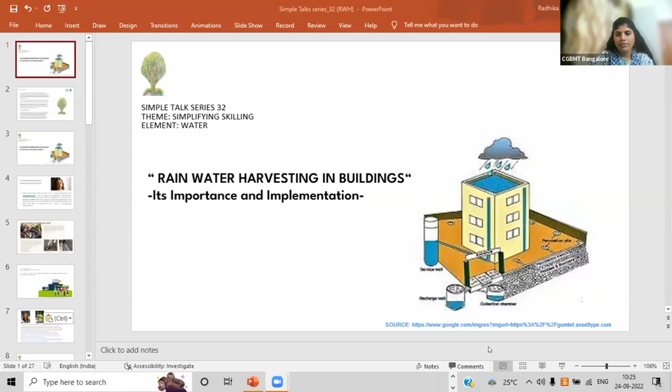CGBMT organizes Simple Talk series in a very grand way, covering all different topics. So today's interesting topic is about rainwater harvesting, and this is Simple Talk series 32. About CGBMT, the Center for Green Building Materials and Technology: it is an Indian non-government organization established on April 26, 2004. The trust was founded by architect Neelam Manjunath as a response to the dearth of awareness and human resources for sustainable development and lifestyle, to reach sustainable development goals. Our work responds to the environmental issues of our times through eco-education, advocacy, research and development, and on-the-ground community projects.

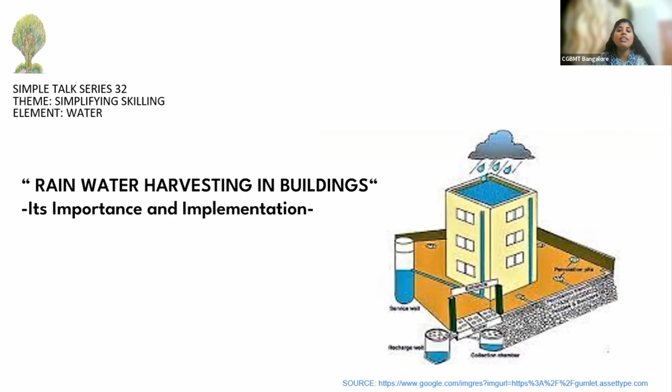Shubha Ramachandran leads the water team at Biome Environmental Trust. She has designed and implemented several rainwater harvesting and wastewater treatment systems, primarily in and around the city of Bangalore. At Biome, she has been working on understanding groundwater, wastewater, and wetlands. She is also a TEDx speaker and has represented Biome at the World Water Week in Stockholm. She is a civil engineer from IIT Mumbai.

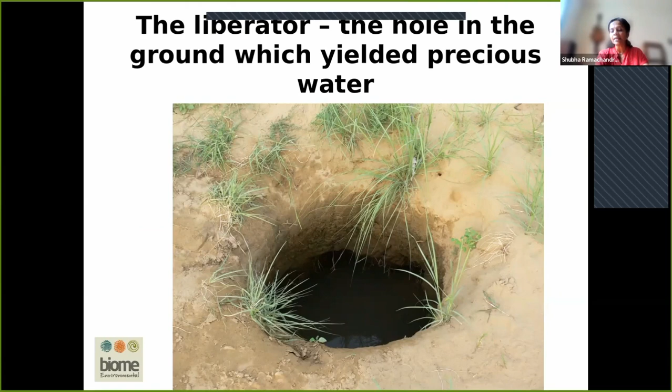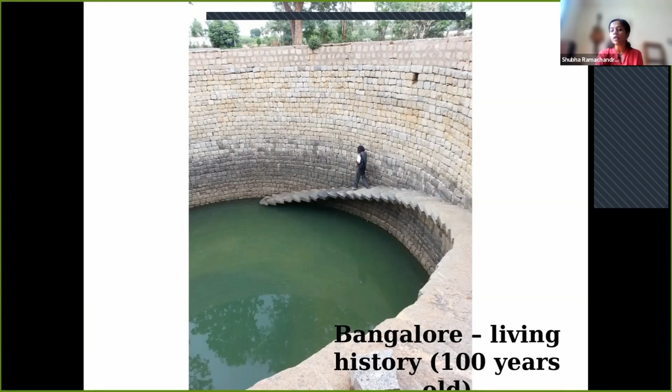Now quickly coming to that, this was just to set up a precursor to how we are approaching the entire topic. Like we all know, given especially the southern part of the country where we have no access to glacial melt rivers, the only water we get is all coming to us from rain. Whether we take it from rivers or from groundwater, deep bore wells, open wells, lakes, finally the source of all water is rain.

What has really changed as we have urbanized, though now rainfall patterns are also changing, is primarily this: earlier, when the land was not built up, there were more trees, more undergrowth, and the land itself was not exposed or hard. Of the rain that fell, some was intercepted by the trees. The surface runoff would not be as much because the water would percolate a little, and we have what are known as interflows and base flows. There would also be some water lost to evapotranspiration.

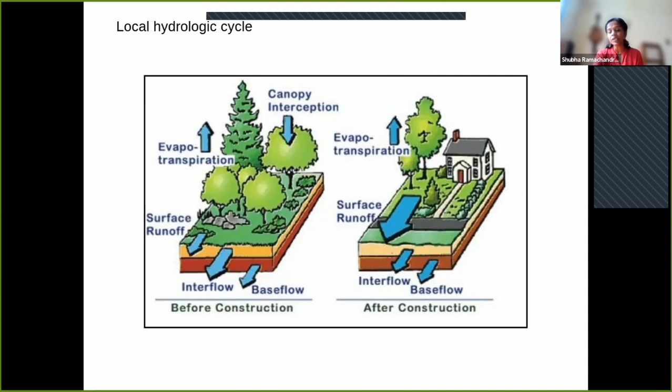Over a period of time, as we built our surfaces, what really happened is that our surface runoff has increased because the ground has become harder. The water, as it falls on the ground, is not able to percolate into the ground. That's why you can see that interflows and base flows have reduced, but the surface runoff has increased.

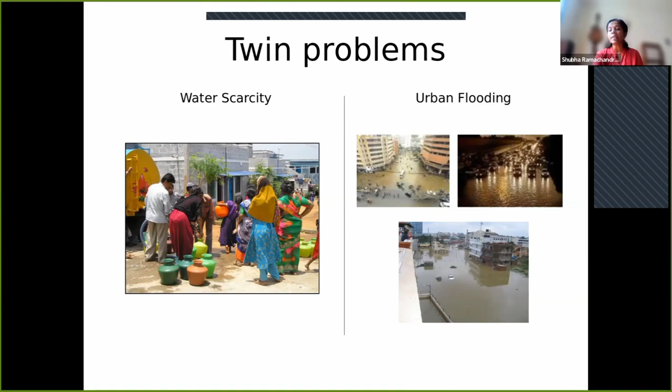As a result of this, especially in urban areas, in summer there is water scarcity. Sometimes across the year there is water scarcity because there is not enough water under the ground, or the rivers are not able to supply. As we just observed in Bangalore, and actually across the world, many parts have experienced extreme urban flooding because now the ground is crusted and the water has nowhere to go. In many cases our lakes or rivers have been encroached upon, and that results in urban flooding.

So what can we do about all of this, and how does this set the stage for rainwater harvesting? I think because the runoff has increased, in a way the potential to hold on to that water has also increased. So we have to see, given our current circumstance, how do we make the most of the rainwater that falls on us?

From there, the water has to be conveyed and taken to a point where you're going to use it for some purpose. That's called the conveyance. If you look at a house with a sloping roof, it would be a gutter. If it's a college campus, there are down pipes. Or if it's just a road, there are drains on the side.

So all of these are various modes of conveyance for taking the water from one place to another, for wherever you want to use it subsequently. Then normally there is a process of filtration, because depending on what you want to use the water for, you have to filter it appropriately. If you're going to be using it for drinking and cooking, you have to be much more careful with your filtration. If you're going to use it only for other domestic purposes like cleaning, washing, bathing, you don't have to bring it to potable water quality standards.

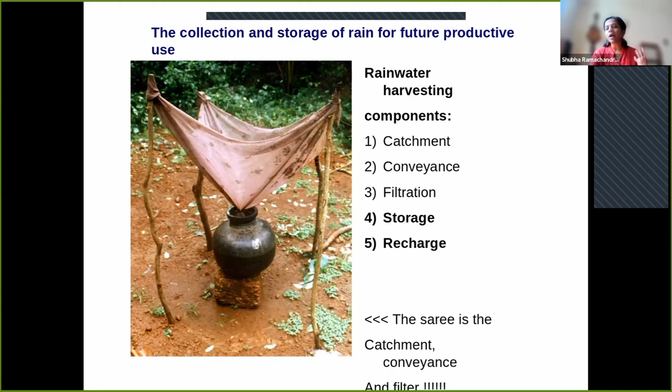But when we actually design these systems, they're a lot more complex. And a lot of this information that I'm speaking about is also available on a site called urbanwaters.in. We'll cover it later in the presentation, but we are trying to build a site like this for every city. Right now we have bengaluru.urbanwaters.in, but over a period of time there is also tumkuru.urbanwaters.in. The idea is to have Chennai, Hyderabad, all of these cities coming up pretty quickly, where you know about the rainfall in a particular area, how do you harvest it, your lakes, wastewater, groundwater, all of that.

Now, an important part of rainwater harvesting is really to understand how much rain do you get, because that will decide how much water can be harvested. And it's not only about how much, but how the rainfall is distributed as well. Because if it's not going to rain for many months in the year, then any system that you have set up will lie unused for that portion.

So the question that comes to us then is, okay, it's raining this much, how much can I really harvest? Now, when I say harvest, it's dependent on the catchment on which the rain falls. And it's also important to see how much do I need. So this is an important number as I come to the calculation itself.

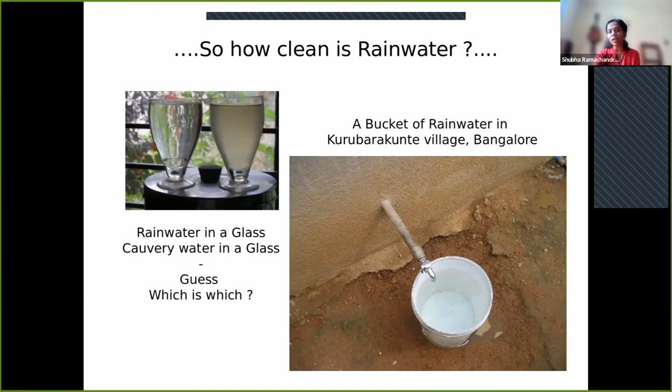And that's what a rainwater harvesting system looks like. You have a pipe that brings down the water. There is a first rain separator here, which we'll speak further about. This is a very simple filter - it's actually not even really filtering, but allowing for sedimentation. The water falls here, and the solid particles settle to the bottom. The overflow water flows into the sump, from where it can be pumped and used in the house.

The overflow from this sump flows into a recharge well, from where it percolates into the ground. When this also fills up and overflows, it can flow out into the stormwater drain, where we make sure it flows further. In fact, rainwater harvesting is also an important part of this system.

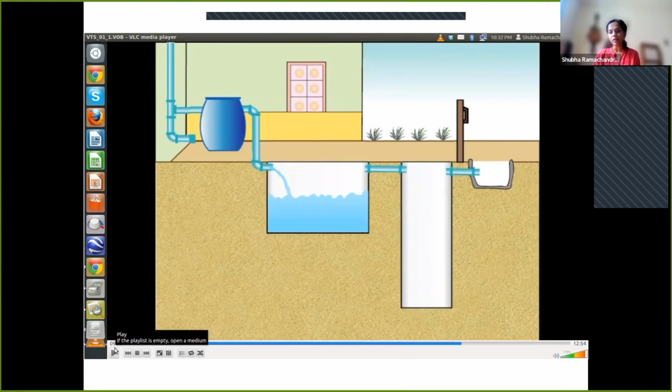You have to look at it like this: when the land was not built up, on every 100 square meters of land, when rain would fall, not as much would run off - let's say only 10 liters would run off from a particular plot. But now, because of the crusting up, where we had 10 liters earlier, we will have 90 liters running off - that's 80 additional liters of runoff from a plot of land. This is what can contribute to flooding, because the land was not expecting this additional 80 liters of runoff. If we were to harvest it, it's an extremely beautiful solution for avoiding or mitigating flooding as well, and we have a few case studies to speak about it.

How is it done? Very simply, join all the pipes and you can bring it to a storage. Here we see just a few examples to give you a sense for what it can look like. A rain barrel is an easy way to start. This is a filter, and this is also a filter, where the tank is also the filter itself.

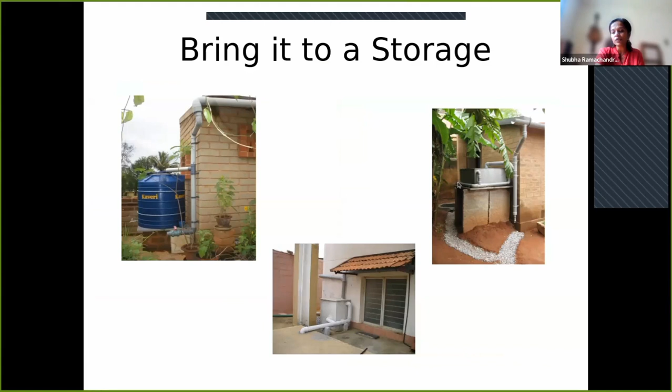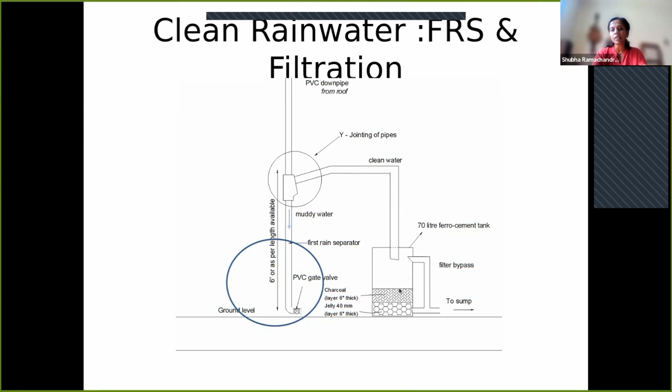This unit is called a first rain separator. The idea is that the initial water that falls on the terrace, we don't try to harvest or filter it, but there's a gate valve provided, using which you can allow that water to drain away. Only after the first 1 or 2 millimeters of rain has come down from the terrace do we harvest the remaining water by passing it through a filter. A filter can be fairly simple. Here we see a ferrocement filter made up of layers of charcoal and small stones and big stones. Very simply put, but the details and design can vary depending upon the end use you want to put the water to.

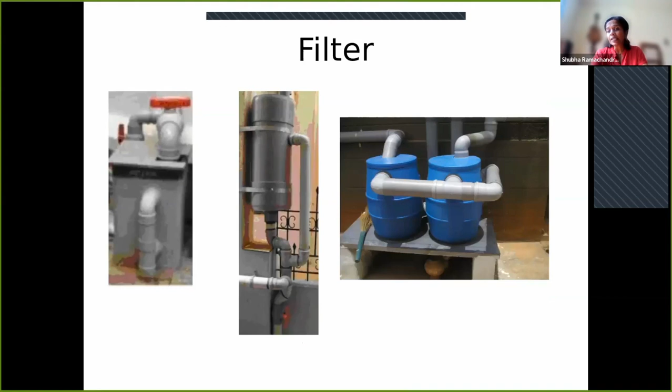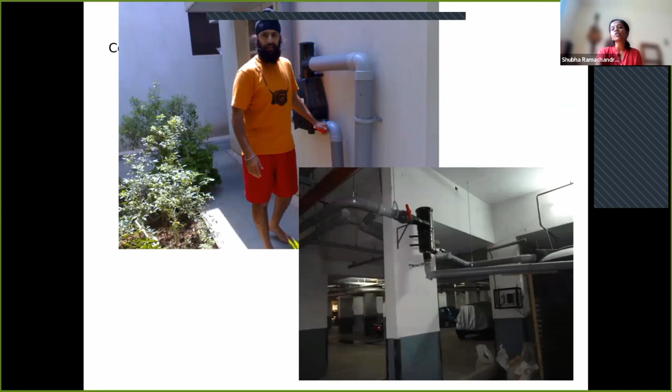These are all just images to show you what the first rain separation can look like, and what filters can look like. You can put filters together yourself with plumbing material. There are also ready-made filters available in the market, various brands, which are much easier to install because they're available off the shelf, and any plumber can easily install it. Here you see it in the basement of an apartment, and here it's at a home, but that's how filters are installed.

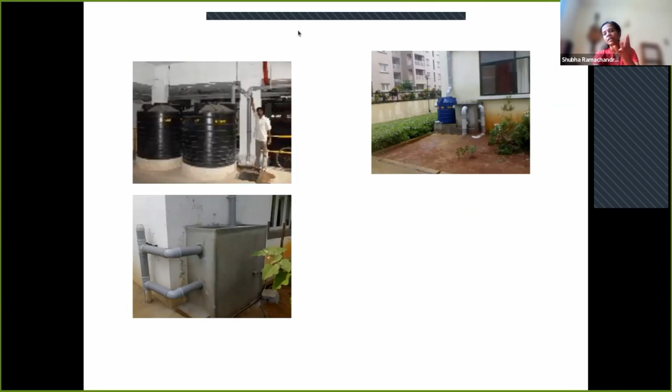These are all, again, various rainwater harvesting systems in basements of apartments, in a clubhouse. So this shows that in various buildings, it can be incorporated.

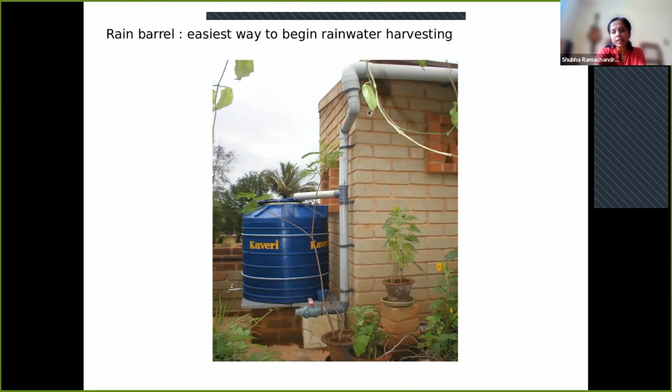Like I mentioned earlier, a rain barrel is really the easiest way. Here, all you do is build a small platform and place a drum on it, and the rainwater falls into it. This is the first rain separator we spoke about. The filter can be as simple as just a plastic bowl with holes and stones on it. For instance, if you're not going to use the water for drinking and cooking, and it's only going to be used for other cleaning purposes, then you can do with basic filtration that looks like this.

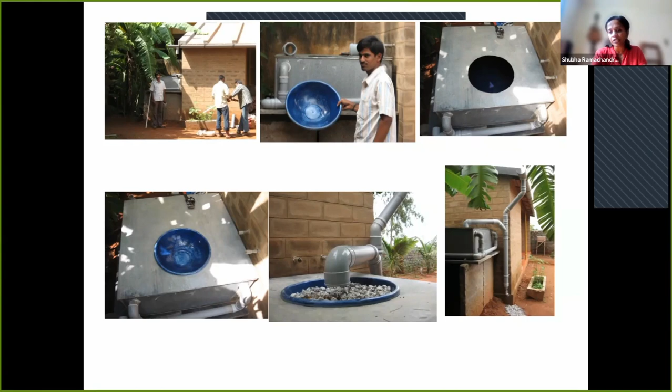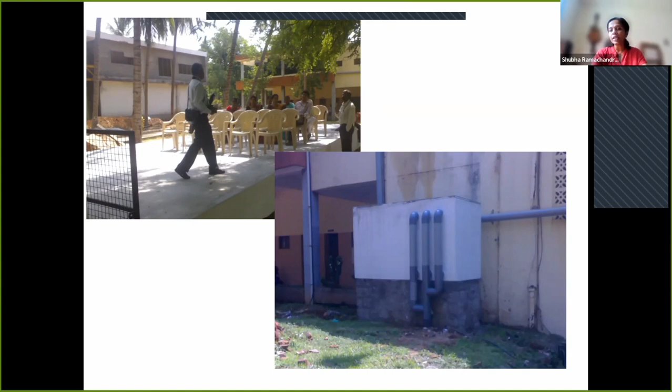Again, examples for storage, examples for filters. This is for a college that we had, for 3,000 square meters of rooftop. The filter looks like this. This is so much larger. Yeah, and that's the sump. Actually, this is the storage where you see the people sitting on it. That's the storage, because here the rainwater that could be harvested even for a small rainfall event was about 1 lakh liters. So when the rooftop is larger, the volume of water you can store is larger, and then you need a bigger sump and a bigger filter as well.

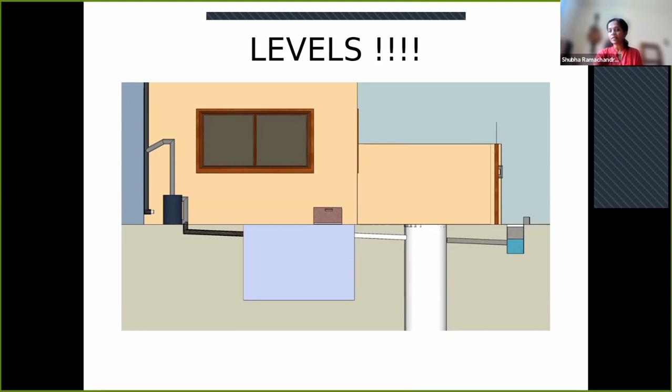The water can be clean, you can pump it and use it. It's very important to keep in mind levels, because all this while an important factor is that we are not using any energy, but the water is flowing with gravity alone, except for the point when you have to pump it back to your overhead tank. The philosophy behind rainwater harvesting is to keep it as simple, as maintainable, as local as possible, built with local materials, with local labor, not requiring expertise or materials from further away. So using gravity is a very important component of rainwater harvesting.

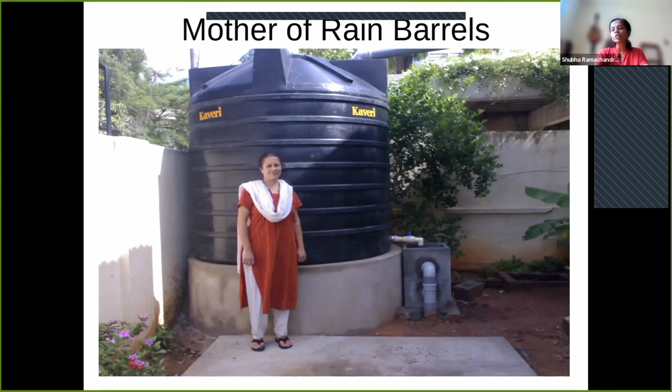This is a house in the center of the city. This lady didn't have space to build another sump, so she bought a 5,000 liter drum. Now that this system is installed, she can go without municipal water supply for 2 weeks at a stretch once her 5,000 liter barrel is full. The water is filled in the barrel, then passes through the filter. That's the filter. It's stored in the sump and used.

So this was about storage of rainwater and reuse. We will now speak about groundwater recharge and how we can use this water to recharge the groundwater tables.

Radhika, how much time has it taken? I don't have my phone. Shubha, you can continue. I think I'll continue, but I just wanted to check. I don't want to overstretch or under. No, I think it's just enough, and perfect.

Okay, so the next important thing we have to think about is that this water I can store, but I can't store all the water that comes to me. If there's a heavy rainfall, like how Bangalore received just a couple of days ago at 130 millimeters, if I just had a 5,000 liter sump, I would not have been able to hold on to all of this water. Also, given that if you look at most of our cities in the country now, more than 50% of urban water requirement, though we may think we are meeting it with river water, is actually being met with groundwater.

Groundwater tables are very quickly depleting across the country. When we speak of groundwater, we have to understand it at two levels.

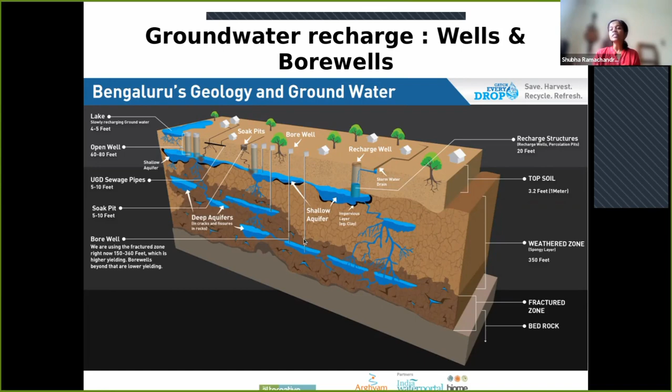In Bangalore specifically, recharge structures going 20 to 30 feet deep reach what is known as the weathered zone. You can think of this zone as a sponge that holds water easily and needs to be recharged. Deep borewells, however, get water from hard rock, from cracks and fissures, where recharge rates are much lower. So you have to decide what kind of recharge structures you want to make.

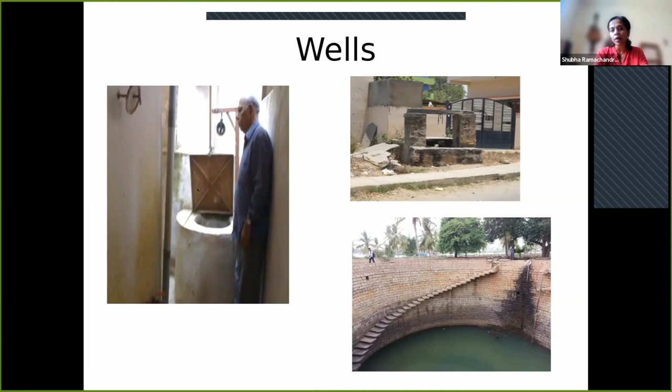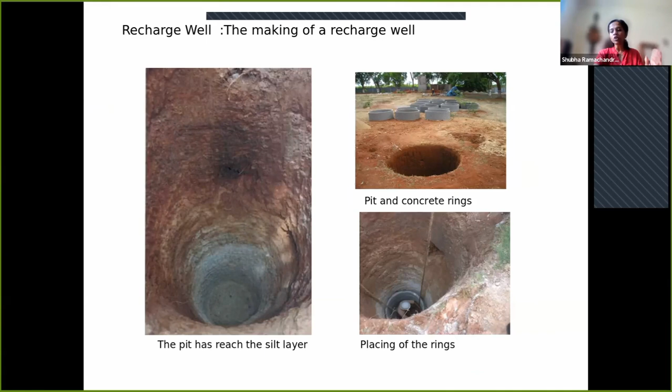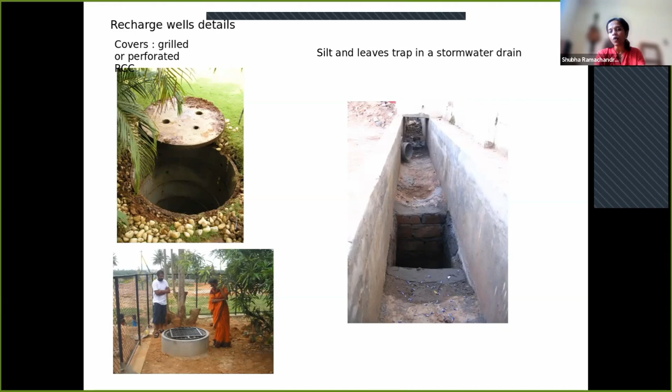This is how a recharge well is made. You dig a pit into the ground until you reach a layer where water can be absorbed. It is lined with concrete rings placed one on top of the other, and the annular space between the rings and the ground is filled with stones so the well does not collapse. On top, it's covered with a concrete slab or grill for safety, so nothing falls in accidentally.

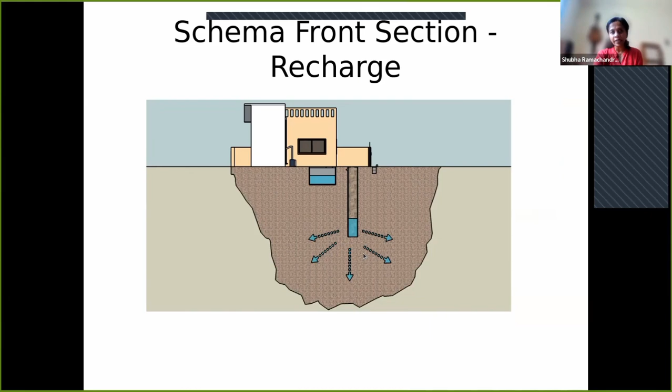These wells can be placed in stormwater drains or in homes, and borewells can also be recharged this way. Water comes into the well and percolates out into the ground. Normally, in the area close to the recharge well, the water table rises fairly significantly. Here are some images of what these wells in drains can look like.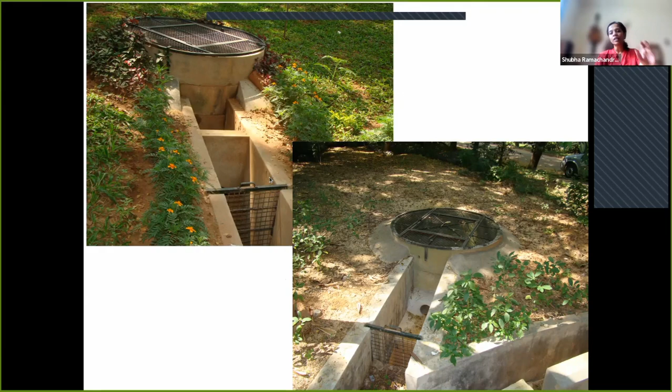This is important because drains often carry plastic, leaf litter, and other waste. So we put in small in-drain filters, a silt trap, or a check dam to obstruct the flow of water. Here, the structure you see is a check dam — when water flows in the drain, it obstructs it and directs the water through a pipe into the well, from where it percolates into the ground.

Various images show that even a simple structure like this can significantly reduce the speed of water and filter it before it goes into the well. The idea is that if the well starts to fill up with non-water material, desilting and cleaning of the well becomes required. So to reduce maintenance effort, you try to do as much filtration as possible in the drain itself. Also keep in mind that rooftop water is very clean.

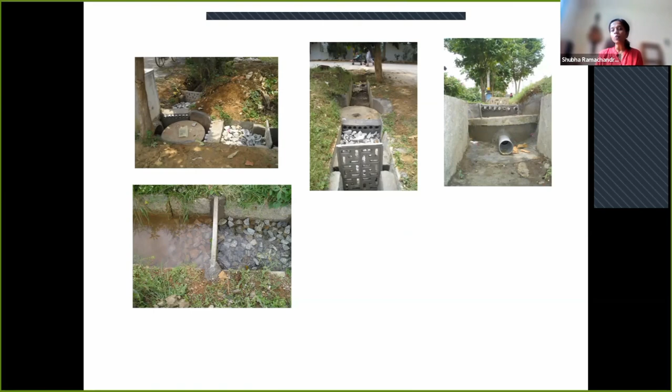If you filter rooftop water, you can store it and use it for all domestic purposes. Ground surface runoff from roads, parks and pavements is not as clean, so it's better to use it for shallow groundwater recharge, not deep groundwater recharge, and I'll explain why.

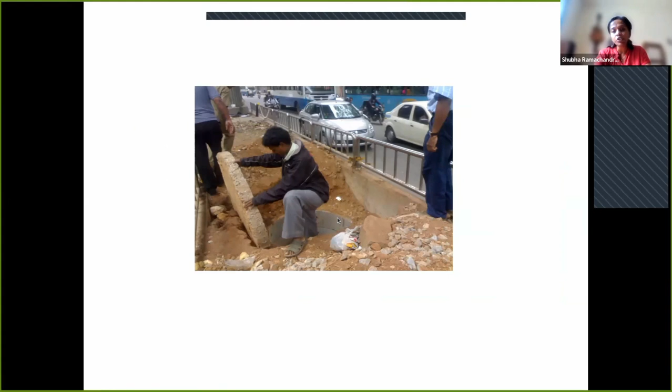Here's another example of a well in a drain, also taking water from a house. This one is actually right below the Bangalore metro at MG Road, showing it doesn't have to be in a house. The water runoff from the tracks and station is put into the ground right then and there.

A few examples of how groundwater recharge can benefit people. This gentleman had a well which dried up after 4-5 years of usage. Here you see the filter he installed to recharge the well. Now the well holds water for him all through the year, so much that he has cut off his municipal water supply and uses this well water all year round. The water is of extremely good quality, good enough for drinking and cooking.

He does have a UV filter at home as well. If we're using rainwater for drinking and cooking, it's advisable to boil it or pass it through some filtration to remove bacteria. That's his well, full of water that's pumped and used.

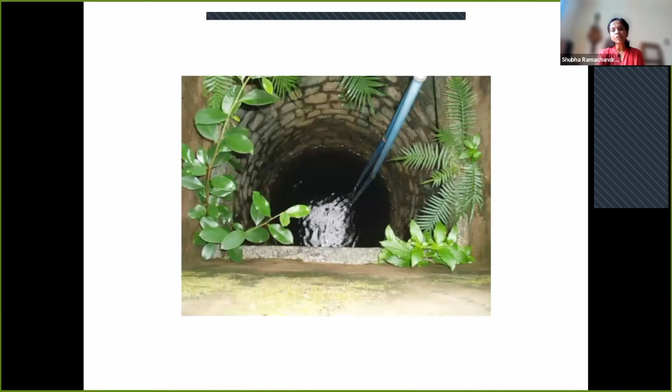This is another home in a different layout where this gentleman recharged his well, and again his well has water. An important part of rainwater harvesting is not just doing it, but talking to your neighbors about it, showing them the difference it has made, because that inspires a lot of people. That's really part of why we're having this visit to the school too. When schools talk to schools, and homes talk to homes, they understand and imbibe this much better.

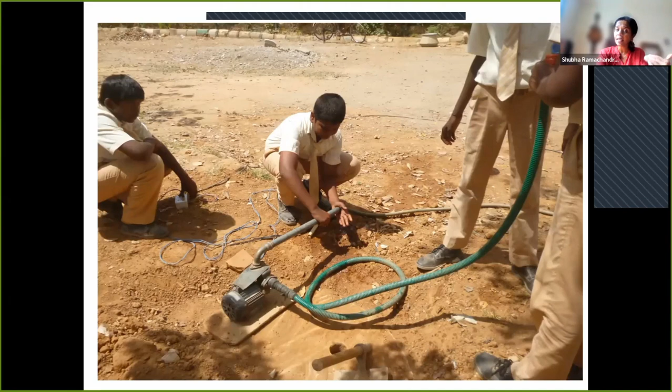This is a school, just to give a few examples. They're right next to a lake and had a borewell, but it didn't have sufficient water. Then a rainwater harvesting system was implemented in the school. A shallow open well was dug and recharged, and now that open well has water, allowing the school to manage. They had even resorted to buying tankers before, but now there's water from the open well.

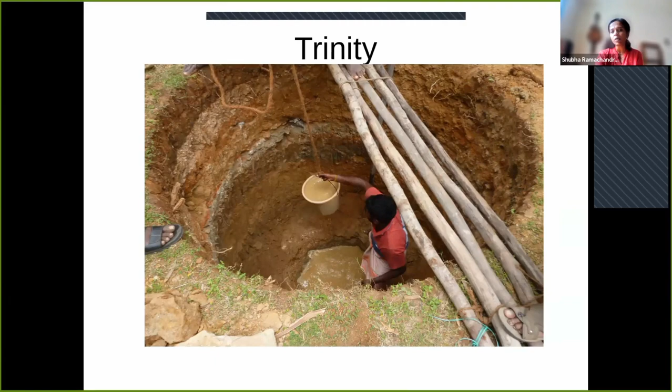This open well's water is used for the school's maintenance and toilet cleanliness. In another layout, it was more a problem of flooding, but with the well, the flooding decreased, and there is water in this well now, which they also use for gardening.

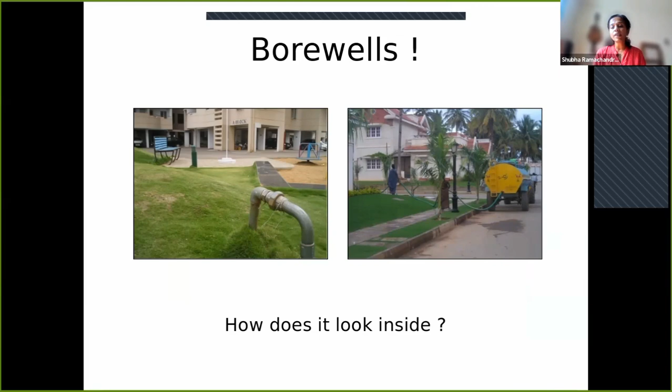Borewells are slightly different, and we have to understand them - there's a good borewell primer on the same site, bengaluru.urbanwaters.in. Watch the videos to understand how a borewell really works. The important thing is, if we are recharging a borewell directly, we are recharging the deep aquifer. We have to make sure the water quality used to recharge the borewell is equivalent to water we'd be fine drinking, so it has to be rooftop water after filtration.

The way it's done is that perforations are made in the borewell casing. This is done only for dry borewells, not dead borewells - mind you, borewells that have dried over a period of time, meaning they're still accessing an aquifer.

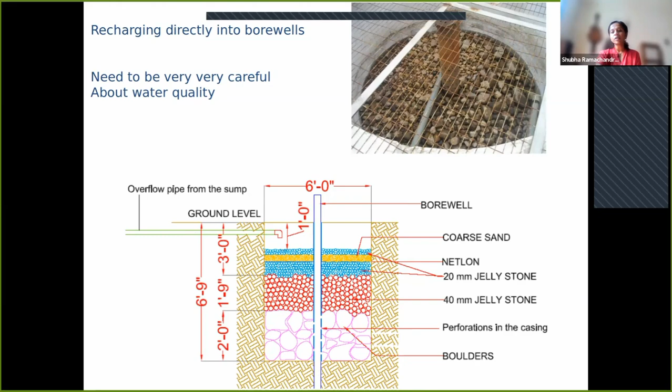These are some images of what it looks like. We have observed that this also works very well. Many borewells come back to life.

In Bangalore, we estimate that citizens and institutions have come together, and we have about 2 lakh open wells that are either recharging or withdrawing water from the aquifer. In many parts of the city, we've seen groundwater table rises, or flooding mitigated. During these recent rains, while some places were flooding, neighborhood apartments called to tell us that thanks to these recharge wells, they didn't flood. We are very thankful, and we want to go back and see those places ourselves.

So rainwater harvesting itself can offer you a sustainable source of water over a long period of time, as well as help you deal with flooding. With that, I'd like to say thank you. There is a lot that I have not covered, but that will get covered in the training, or we're happy to do more detailed sessions of how all of this can be done. Thank you.

That was excellent, ma'am. We got clarity, and the statistics you explained support the point that there are a number of people who really wanted to do this, and are giving support in recharging the pits and wells. They have realized it is high time that we recharge our wells, and how we can implement these things. That is really eye-opening for us.

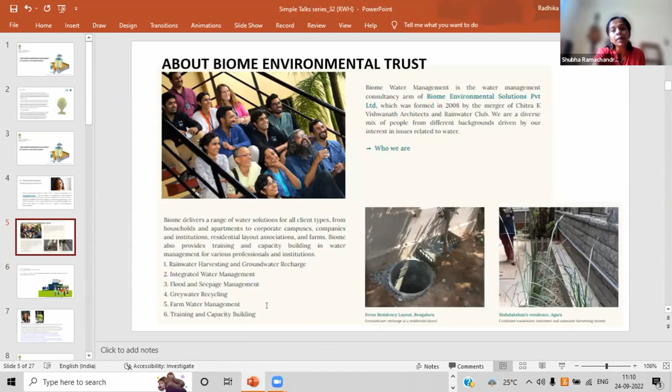One minute. Can you see the screen, ma'am? No, not yours. Maybe I have to stop sharing. Can you see it now? Yes, okay.

It's basically a small village or hamlet in Yelahanka Taluk, with a rich tradition of open wells. The session will consist of a visit to a government school which has implemented various management practices like rooftop rainwater harvesting, recharge wells, and aerators. It will be great if you can actually reach out there and take this good opportunity.